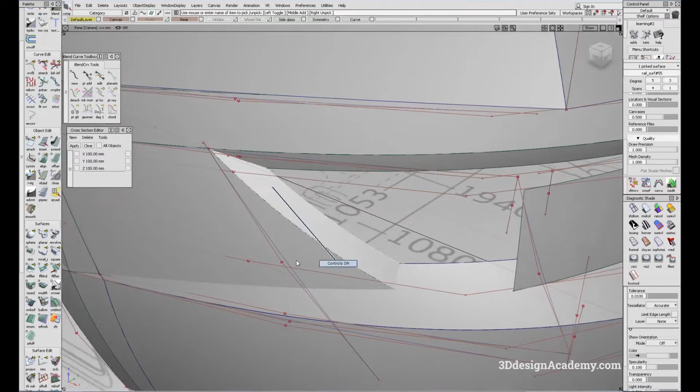In the previous lesson we worked on the lower a little bit, so I'm going to continue with that. First thing is to clean this up a little because right now it's got way too many spans. So let's do a little cleanup. Right now it's a multi-span surface, it's a simple monorail, so I'm just going to simplify it a bit.

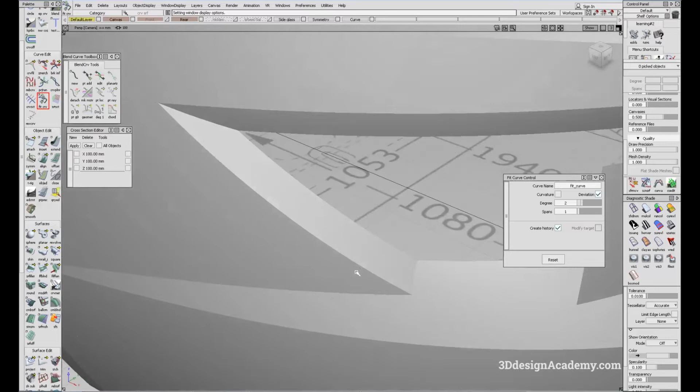Before I do this - because it's a monorail with a little angle on the surface, you'll see it looks a little hollow, as you can see right here. So I'm going to try to fix it a bit.

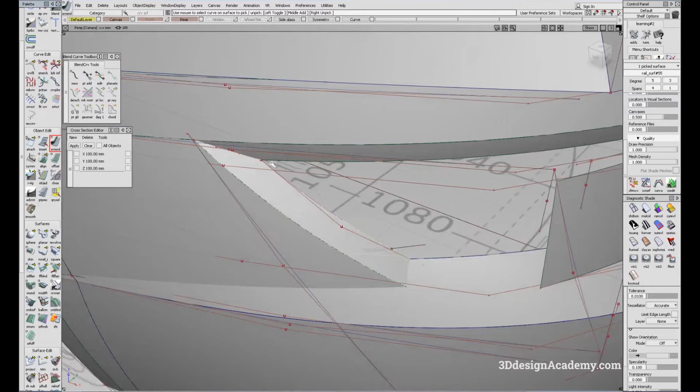What I'm going to do is a fit curve, degree 2. Because it doesn't need to be long, I'm just going to do something like that. I think that looks pretty good, and maybe I'll extend it over here too, like that. So right now this should be positional because it's a fit curve, and we matched this surface using this curve here, so that should be okay.

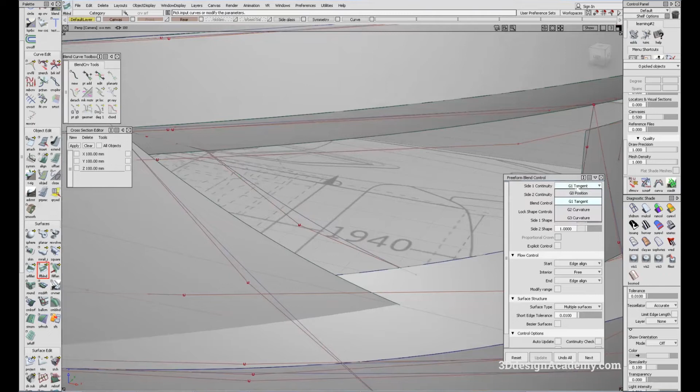Now let's try a freeform blend, position like this. Instead of doing an edge align, I'm just going to say default on this side too, and use explicit control, degree 5, to give it a little bit of crown. Maybe start with 0.005.

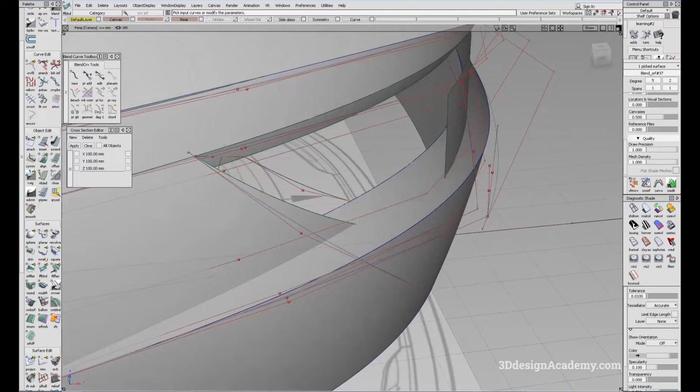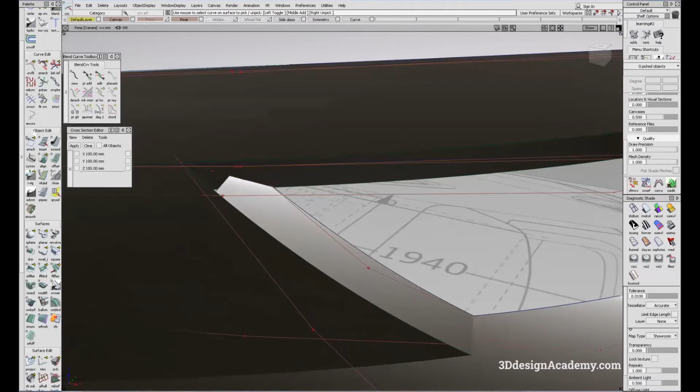I think that looks much better. Let's compare it to the image - yeah, just a little bit of crown, I think that should be okay. It's a little bit short here, so I'm just going to extend this piece like that.

I'm just going to make sure this is exactly positional over here. So that's good. Next step, I'm going to fill this hole right here. If you see the image, it's covered by - I don't know if this is an actual tail lamp - but we do need to fill this area because there's a surface there.

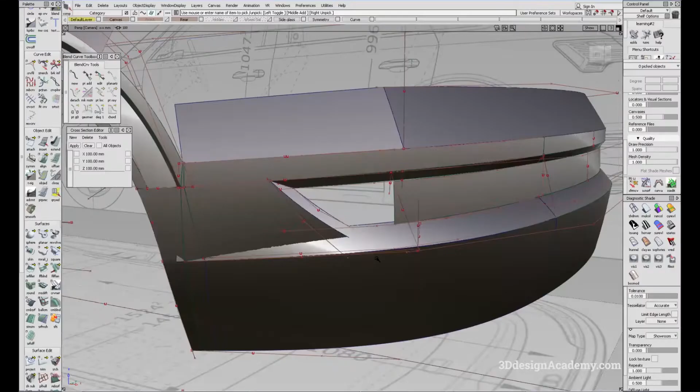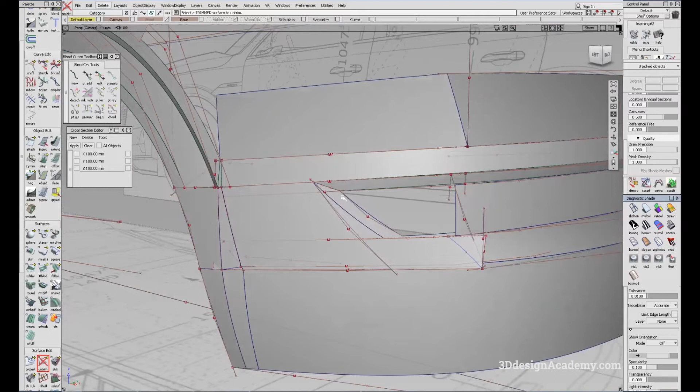First of all, I'm going to delete some of the history on these because I don't really need them, and I want to make sure they stay intact instead of history giving us trouble. So I'm going to say untrim, and on the top I'm just going to delete the history on this too.

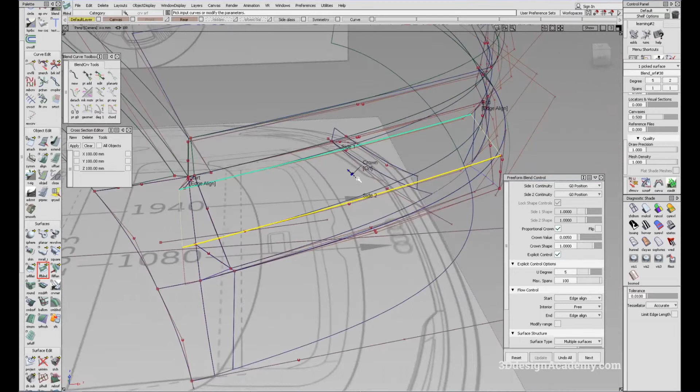I'm going to untrim the primary surface, and using freeform blend, position, I'm just going to snap over here like that, and say default. This one you can say default too - it doesn't really matter because you won't be able to see it anyways.

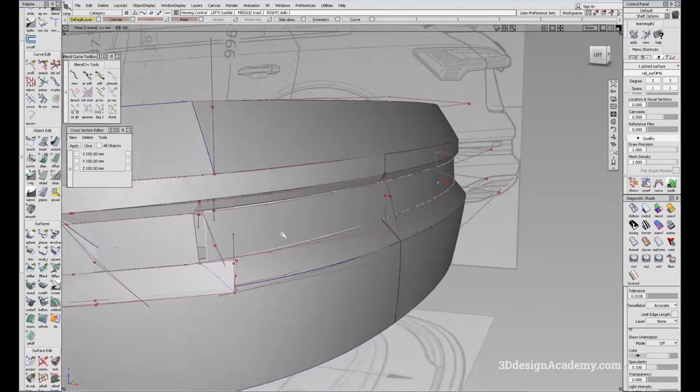Give it a little bit of crown - this was a rail. Maybe a little bit more crown, not quite sure. Okay, maybe not that much, so I'll just stick with 0.005.

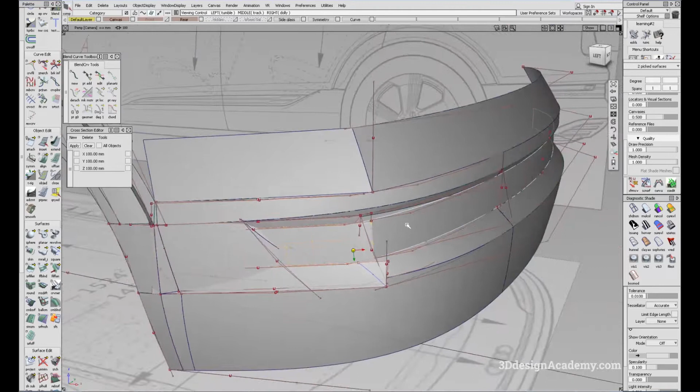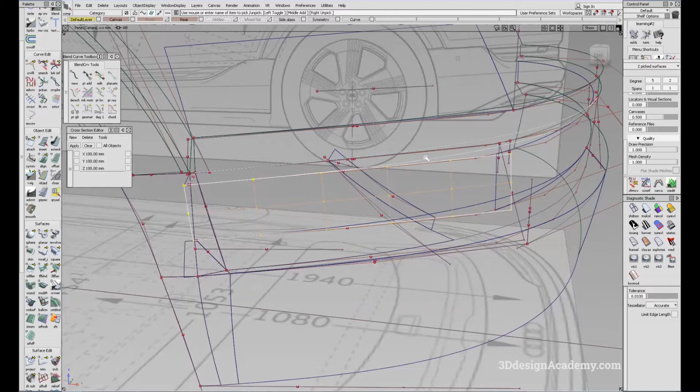What I'm going to do is extend these, and also this one - well, maybe I don't need to extend it. Next, I'm going to trim these surfaces back to their original shape, and grab this one, the fillet over here, the fillet down here, and the surface right here.

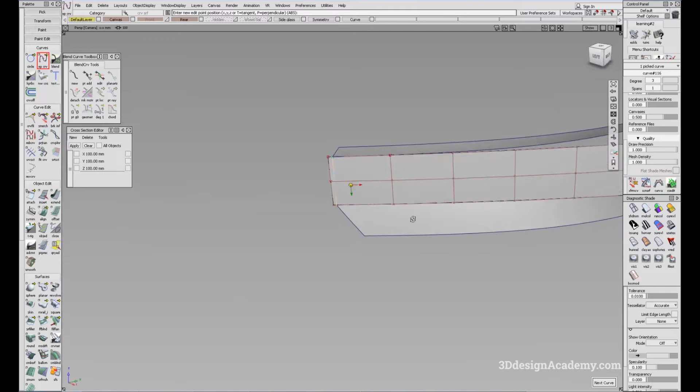Because we already have a fillet on both sides, all you have to do is connect the dots using a curve and fill it in with a square. I'm just going to do this, and same thing on this side, and I'm just going to project.

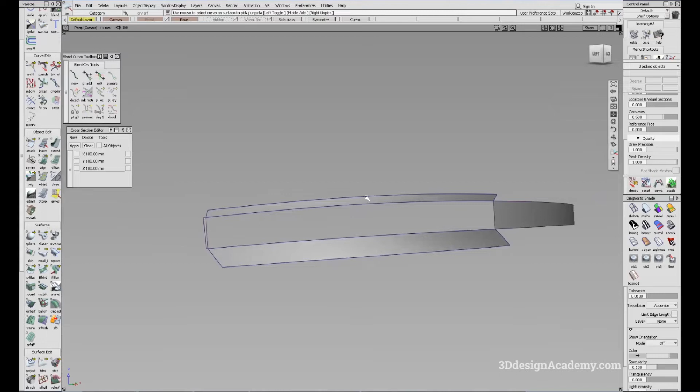And over here I'm going to keep, say keep. The reason I'm matching these is because if you see in the image, they follow the exact same line, so you want to make sure the fillet also matches between the top and the bottom. Using a square, I'm just going to say 1, 2, 3, and 4.

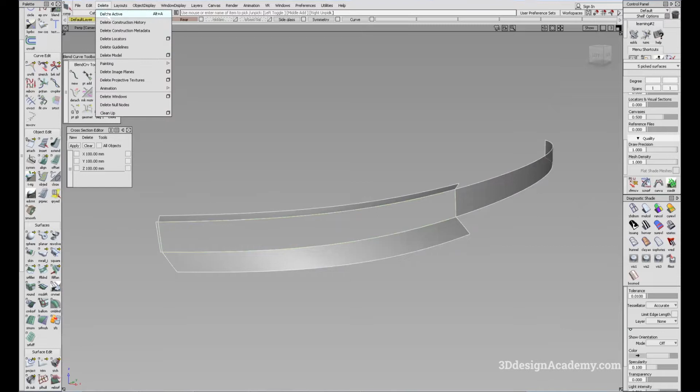Looks pretty good, maybe I can reduce it - looks like even degree 2 works. So that's very clean, I'm going to delete construction history. I'm happy with what I have.

Now you'll notice there's a little bit of a gap. Well, all you have to do is extend it and trim it. So I'm just going to extend it like this, and using intersect, I'm just going to trim this piece.

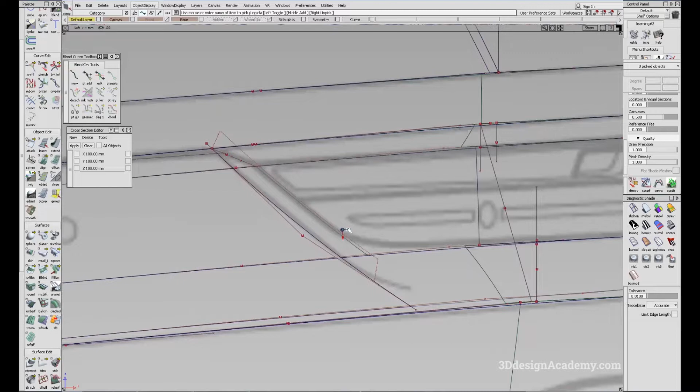Now what I want to make sure is that I know the intersect is a little bit different from the curve that I generated, so all you want to do is make sure it's pretty close. Looks like it's a little bit off here.

So instead of extending, I'm actually going to extend it back, and using a line, I'm just going to - it's a little bit long here. So, oops, what happened? Okay, I'm just going to revert, and using a line, actually extend first.

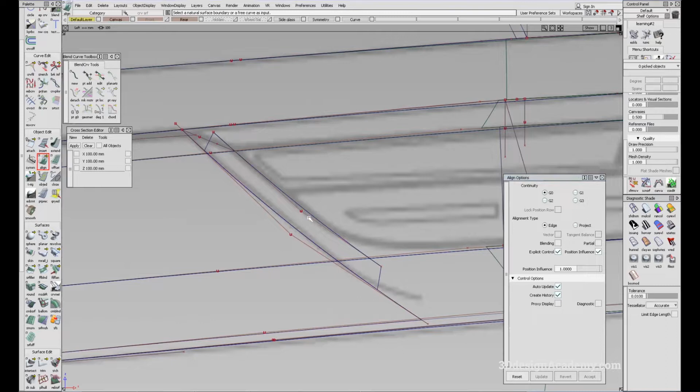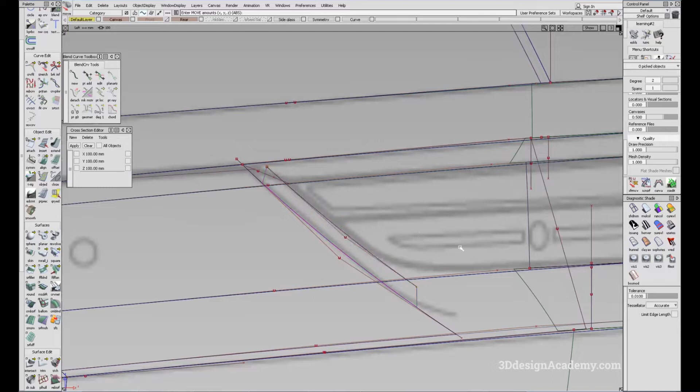Align to the surface, align the surface to the curve, save position, and blending on. I'm just going to shift this a little bit forward in car, because right now my line over here is a little bit forward of the canvas image. Oh, and when I'm doing this, I want to make sure that it's lined up well here.

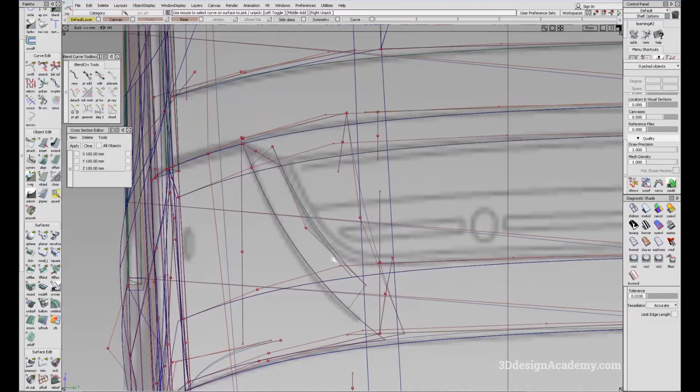Well, actually, we're going to use intersect, so I guess it's not too much of a problem. But I do want to intersect these two surfaces to make sure that the inboard line is following closely to this line. It looks like it's a little bit off. I'm going to guess that it's also due to the bottom one being a little bit inboard. So I'm going to say that's close enough, I think that's pretty good.

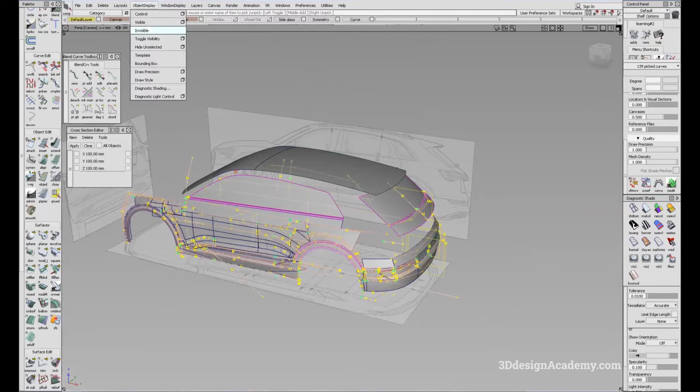So if that's the case, I'm just going to extend both sides and just do a trim. I'm going to intersect here and here, and just trim it. Then I'm going to get rid of all the curves, say invisible, and take a look at it and compare it to the canvas. Actually, I think that's pretty close. It's a little bit off, but I think that's pretty good. Okay, I'm happy with that.

Yeah, I think that looks pretty good. Okay.

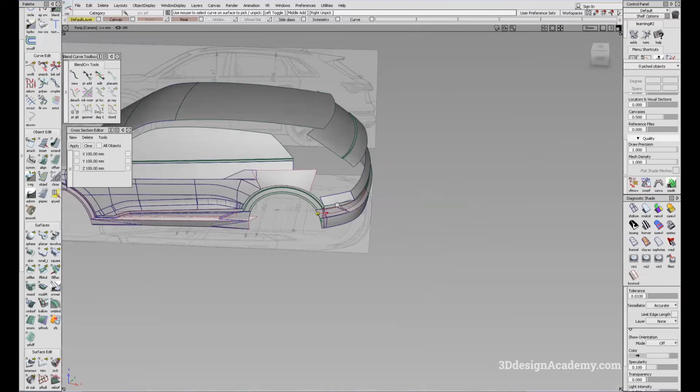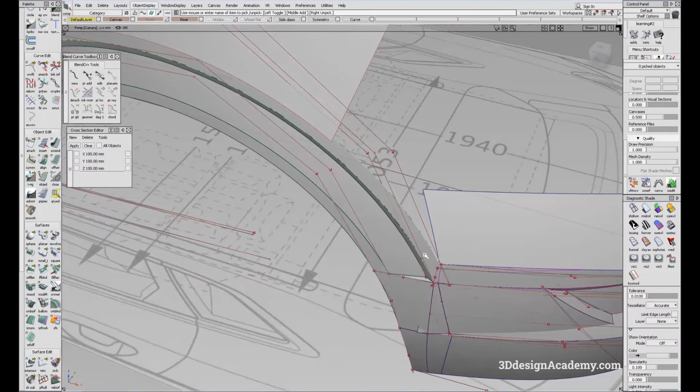So moving on, that space has been filled nicely. I'm going to continue on the fender over here. You'll notice that there's a little gap. So what happened is we had to remove this curve over here, or the wheel flare, in order to match not only the rear canvas, but the rest of the vehicle, and make it all more like the actual car. So in the process, I had to move this a little bit more inboard, and that's the reason why we have a gap.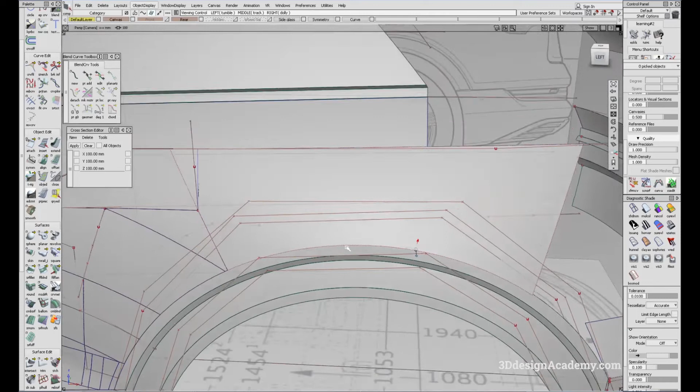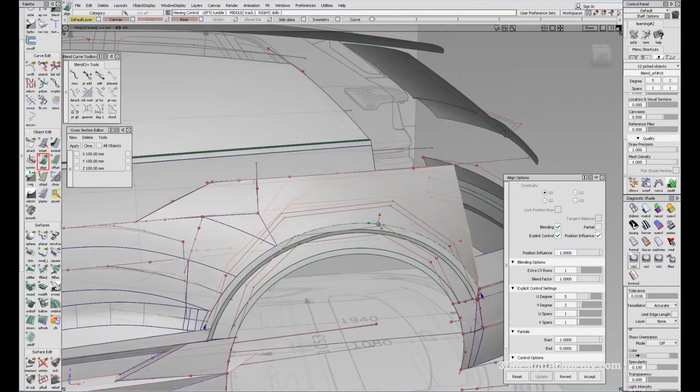So now we need to do some updates. First thing I'm going to do is make sure that this is untrimmed, and I'm going to align this piece to the new location of the wheel flare. So I'm just going to say align. You can either grab the surface or the curve, that doesn't really matter. And I'm going to say partial. Right now I have the blending on, extra CV 1, blend factor 1, and I think that's pretty good. So it's really actually quite quick to realign this.

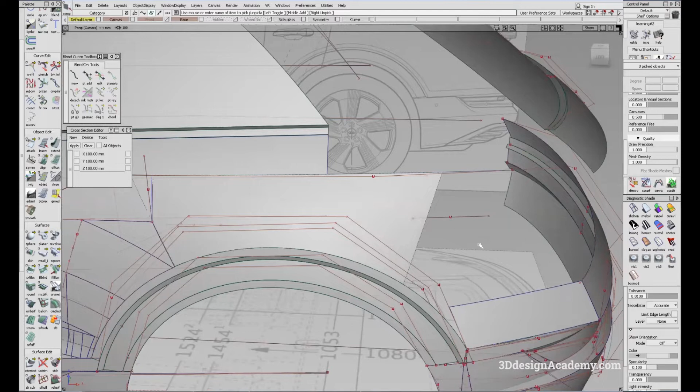Now I do have to realign all the surfaces over here, but I'm going to save that for later because I want to cover some of the area over here. Okay, so the next thing I'm going to do is try to fill this area over here.

So what I'm going to do is, first of all, I'm just going to go to side view, and I want to fill the space over here. I think I'm going to start with the top piece over here. So I want to fill this area, and you'll notice that there's a feature line that actually disappears into the fender. So I'm going to try to create that.

Okay, actually, let me go to the side view. Let me see if I can get an image of the side view and see where I need to do this. Okay, so on the side view, you'll notice that this line starts to disappear around here. So I'm gonna have to, I'll probably do the same thing over here. So I think this, the chrome piece, where the location of the chrome piece is, I think that's a good location to start this piece over here.

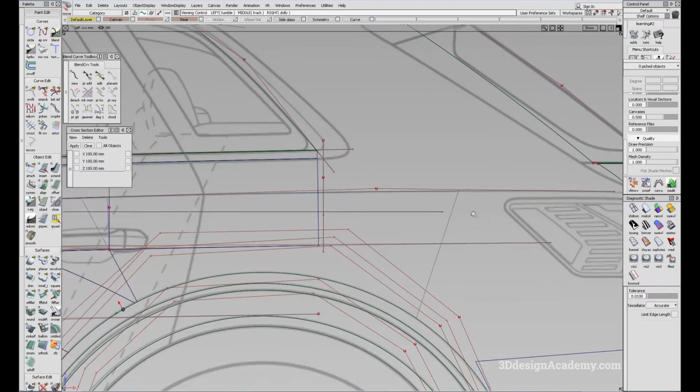Okay, so I'm just gonna go back to the model. I'm just going to do a curve like this, just up and down. And right now we're just trying to fill the hole and see how it looks. So it doesn't need to be super exact. We're just looking to block in some surface and see how the shape works with the rest of the vehicle.

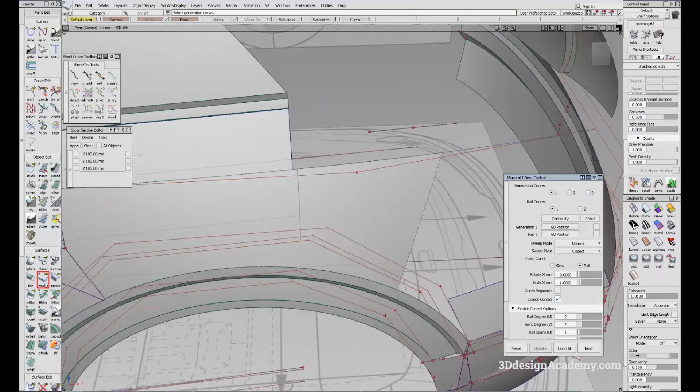Okay, so I just projected a curve from the side view, and I'm just going to use that to create a monorail. So, 1 and 1, like this, and I'm going to be using the curve segment tool like this here to snap it over here. So it's a little bit off. Okay, so that's good, nice and straight. It gives us a nice parallel horizontal highlight.

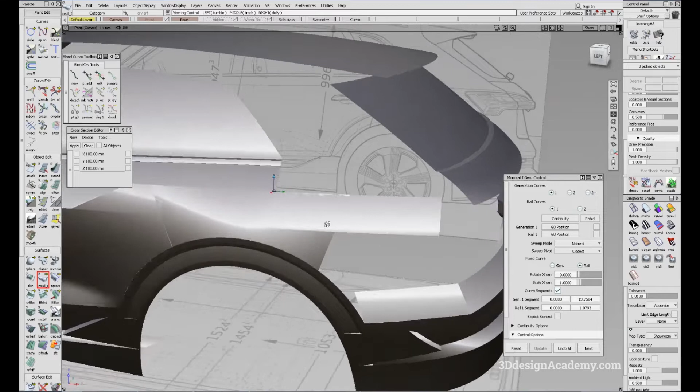Okay, so that's been filled. And next, I'm gonna, okay, so this one, I probably have to create some surfaces over here.

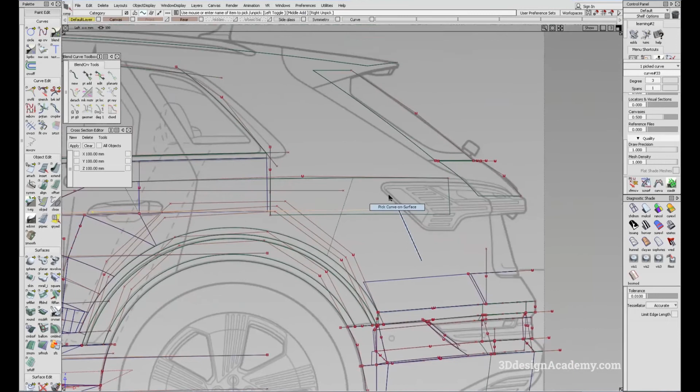But in the meantime, let's see, it looks like that's a body feature line. Okay, so what I'm gonna do is I'm just gonna project this curve. Now there is a chance that I might have to adjust this, but using the project, I'm going to just trim away this piece so that we can control this feature line over here. Now this actually needs to blend into the tail lamp over here, and you'll see that it's sort of ending up somewhere in the middle of the tail lamp. So I'll have to blend it in with the rest of the rear.

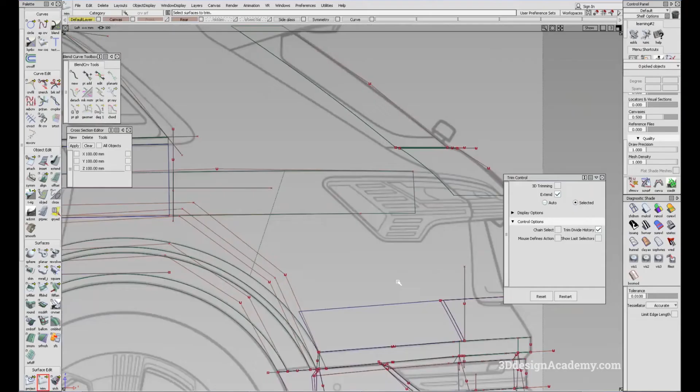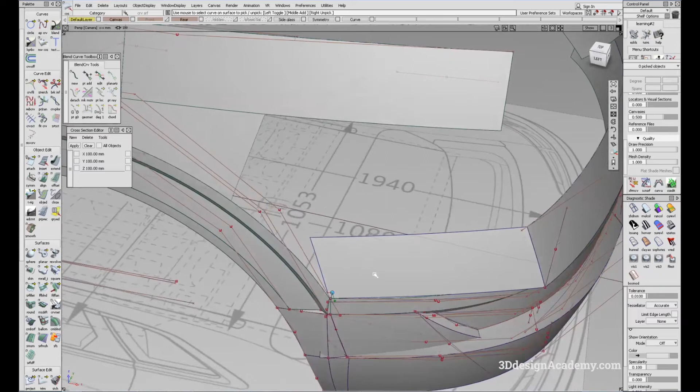Okay, so I think I'm just going to position it over here for now, and we'll have to adjust it once we get some of the rear surfaces filled in. Now the next thing I'm going to do is I'm going to try to fill this surface over here. This should be a very large slab, and let's see. What I'm going to do is I'm actually going to snap a curve over here, and I'm going to snap a curve over somewhere here.

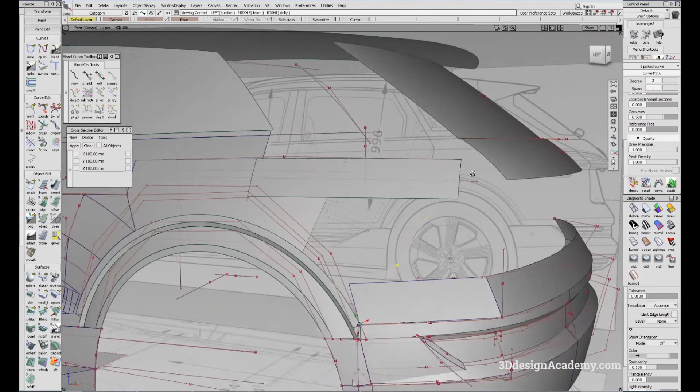Actually, I'm going to do just a straight up and down. Now it is a straight up and down, and it's a little bit longer than I need. So I'm just going to use a stretch tool to snap it at this point right here. Oops, oh, it actually snapped at the curve. So I'm just going to make that invisible. Again, using the stretch, snap it back here, and using a degree 2 curve. Change that to degree 2, and I'm going to give it a little bit of crown.

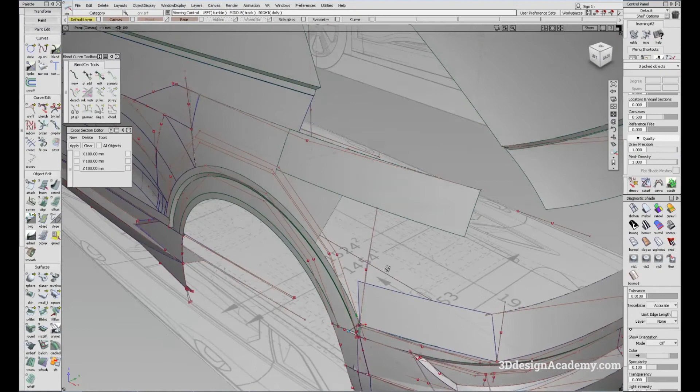Now, when you see this feature surface over here, you'll see that there's a little bit of light catcher, which means that you can snap the curve over here to the feature line, but this one, on the other hand, has to be a little bit inboard to give a little bit of light catcher over here. So I'm going to use the stretch tool like this and just move it slightly inboard. And I'm going to try to create a rail using this. So just a simple rail. It's going to have a span in the middle because right now I'm putting the generation curve in the middle of the rail curve, but that's okay.

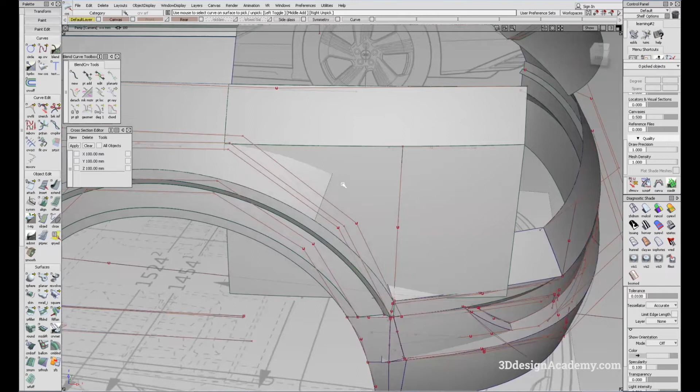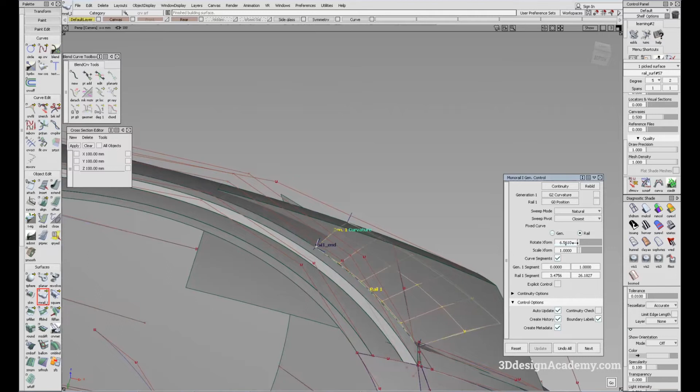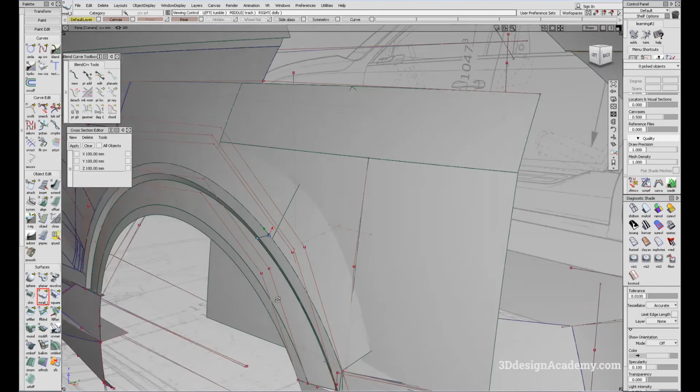Okay, so the next thing I'm going to do is, because we need to figure out the distance between the wheel flare and this body surface, I'm just going to do a rail over here like this. And I'm going to do a curve segment over here, and make sure that generation 1 is G2 curvature. Now the CV structure might be off, so maybe I'll do a little bit of rotation like this. Oh, maybe that's not working so well. So there's a chance that I might have to fix this area a little bit. Maybe I'll just not do rotation and leave it like that. And if need be, I can just do a fillet over here. So I don't think it should be a critical problem.

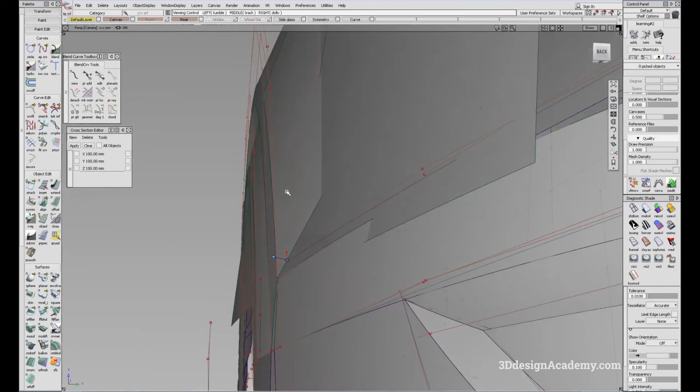Now, the next thing I'm going to do is I want to make sure that this surface and this feature line over here also have a nice relationship. Actually, I think there's a little bit too much distance between the wheel flare and the surface over here. So using stretch, I'll pull this a little bit more outward. Now, you'll see that this is such a slight light catcher or feature. So you also want to make sure that this appears very small.

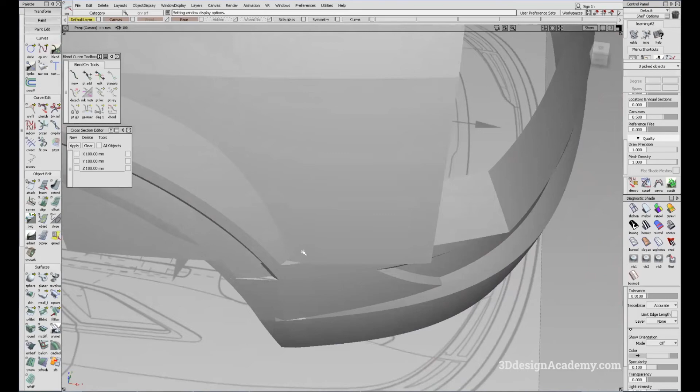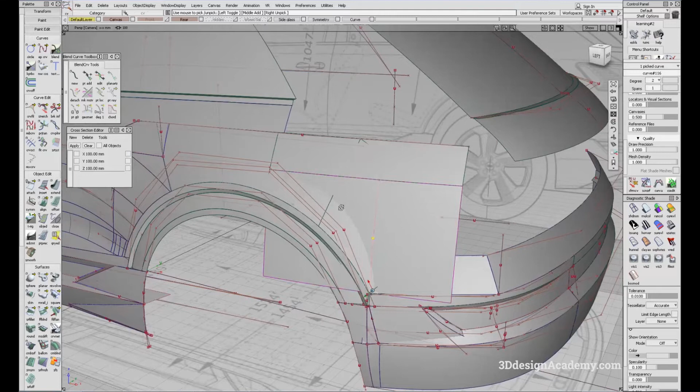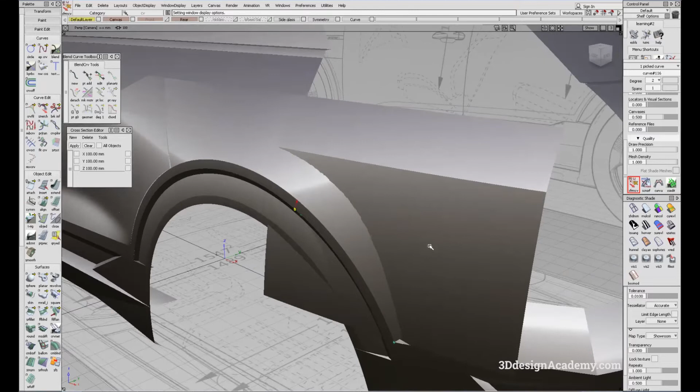Now, you'll see right here that we were able to achieve a reduced amount of, I don't know if you call this a light catcher, but reduced amount of fender space. So it goes from wide to thin. I know it's a little bit wider here, but I think we'll probably need to do some refinements later on. Maybe I'll just give it a little bit more crown to reduce the section in the middle. Something like that. And with the intersecting surfaces, you'll be able to see a nice relationship between the side surface and the fender. I'll just give it a little bit more crown. Okay, and that's good.

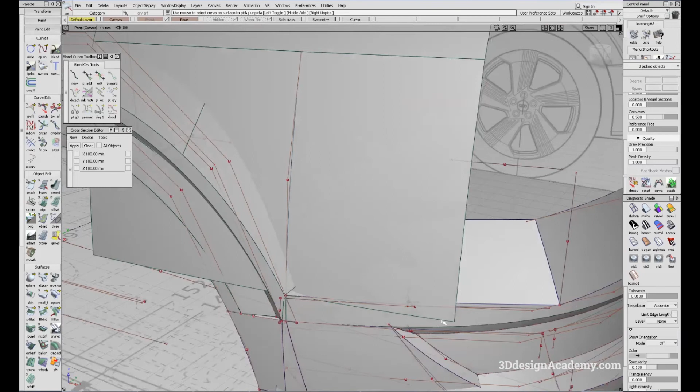Now, the next thing: you'll see that the relationship between this surface and this surface is not good. It's not aligned, in which case we have to make it so. So the first thing I'm going to do is, now you'll notice that this is actually a little bit off. We created a new curve over here. Oh, this is actually a different curve. Okay, let's see.

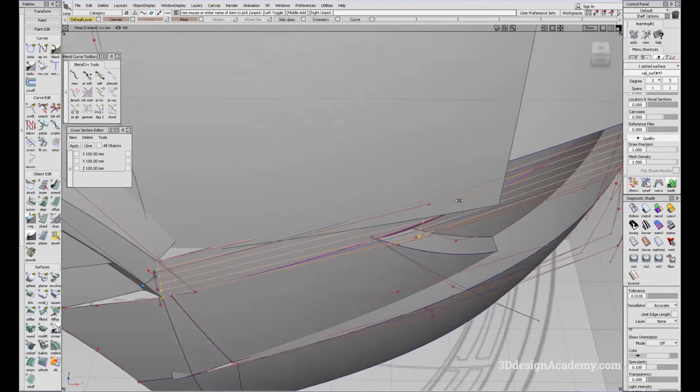Oh, maybe it is. Okay. Now I'm just going to delete the history on this and also on this piece over here so that it doesn't create any problems. So I'm just going to untrim it, and you'll notice that it's a little bit off from the surface that we had before. Right now this surface is a lot more complementary to the other surfaces and also the canvas.

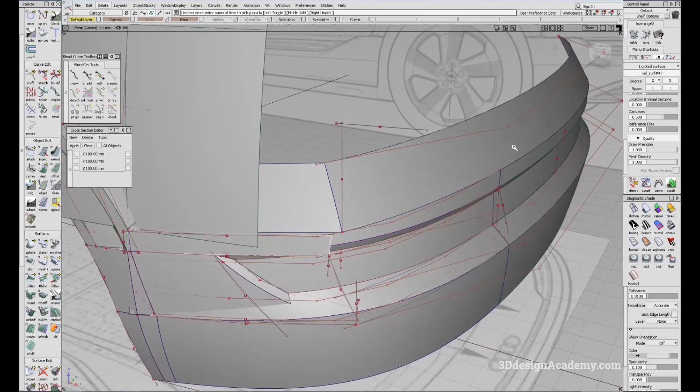So I'm going to snap the surface to this edge over here. I'm going to just untrim this piece over here. Actually, I should maybe extend this too. Okay, so I'm going to extend this first. So I'm going to say untrim. I'm going to make sure the symmetry is on, and I'm going to extend it just slightly beyond this point.

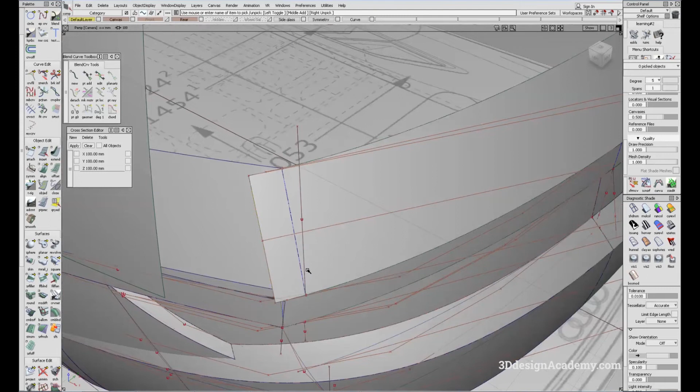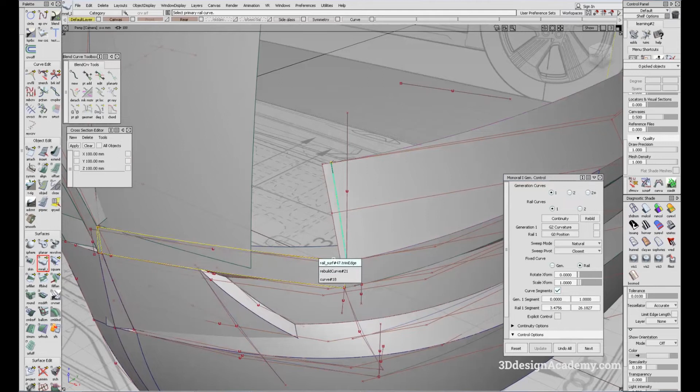And I'm just going to actually remake the surface. So I'm just going to snap it right here where these two intersect, and delete the curve and surface. This surface we no longer need. I don't know if I'm going to keep this angle, but let's use that for now. So I'm going to say project normal like this, and using the rail curve or a monorail, I'm just going to do a rail. This is going to be position.

Okay, so it looks like that's actually creating a problem. So I'm just going to trim this piece away, because right now the rail is longer than where the generation curve is located. Oh, actually, we might need to update this too. You'll see that there's a little bit of height difference. So I'll update that. I'm just going to delete the curve and surface over here. And because it's a little bit short here, I'm just going to re-intersect. So intersect.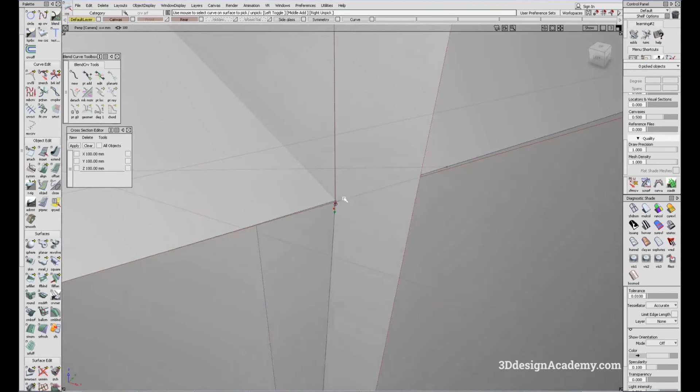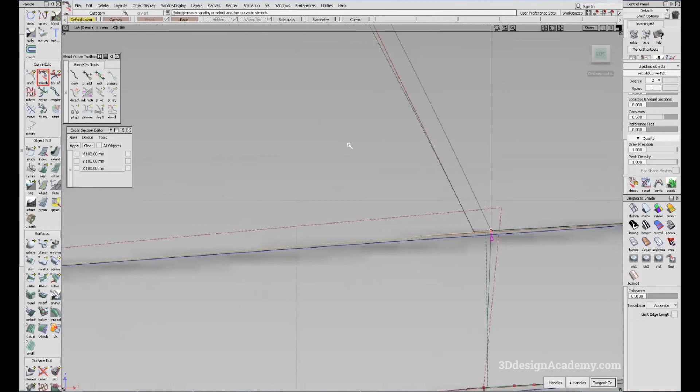And this curve over here needs to be moved up. And this curve over here, which I used to project with, also needs to be updated. Okay, so where did it go? It looks like this is the curve that I used to project with. So using the stretch tool, I'm just going to snap it over here, and I'm going to reproject. Just gonna grab this one, project this curve on there, like that, and I'm gonna change it to view. Now I'm just gonna make sure that it is snapped right here.

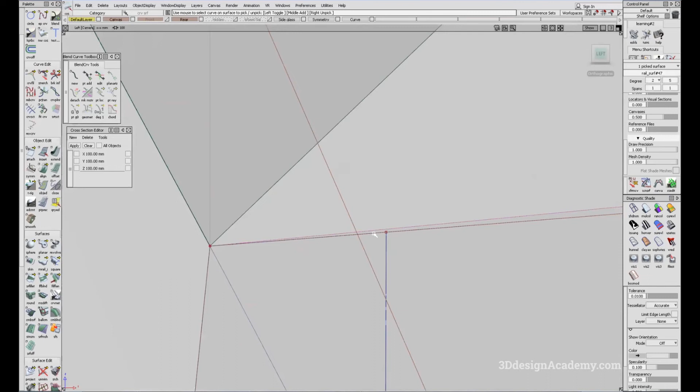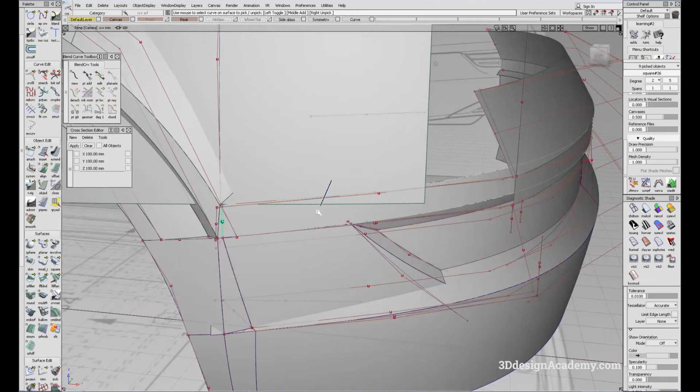Okay, so that's good. Oh, actually, because I deleted the history, I probably need to update this too. Or do I? Okay, I think it's okay. So I'm just going to trim this piece away right here. And now in the process, I probably want to align this again. Align. I'm going to turn blending off, G2, and I'm just going to make sure that this is edge. Now it's just a minuscule change and you might not notice it, but we still need to make sure it's nicely aligned.

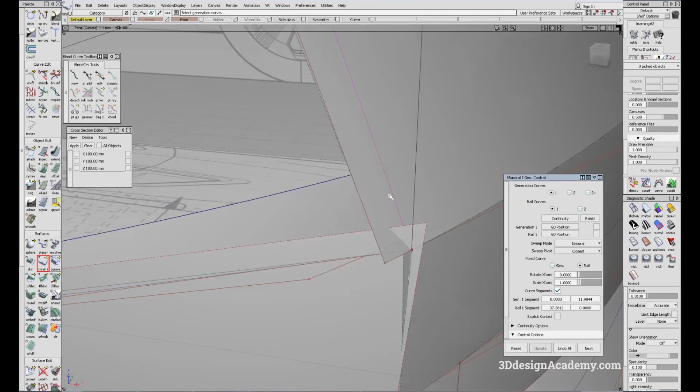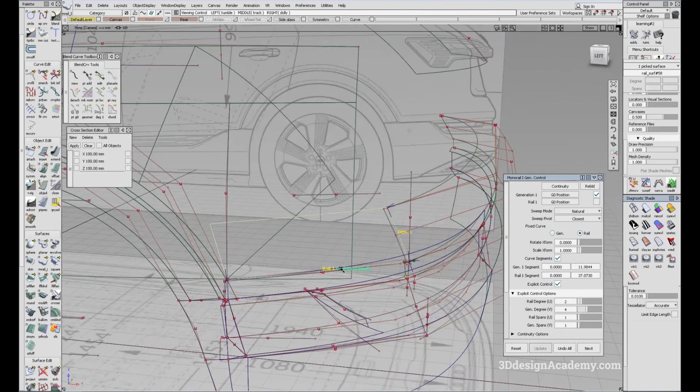Okay, I'm just going to untrim this piece again, and using this edge or the curved surface, I'm just going to create a rail. So monorail, I'm going to grab this piece and the curved surface over here and just do a rail. And looks like we got too many spans. Explicit control on. Now generation curve, degree 3, 4, and the rail curve. Looks like it's position failed now. 3, 4. Okay, looks like 4 will do.

Okay, so now that we have this one, I just want to make sure that this also is complementary to this line. So I'm going to use a rotate. Pressing Alt and dragging the mouse in this box over here, I'm just going to make sure that this is somewhat complementary. I don't know if this should be parallel or it should be shrinking or becoming larger. It probably needs to become a little bit. Well, I think it just needs to be complementary for now, and I'll try to figure out if this maybe needs to be a little bit bigger.

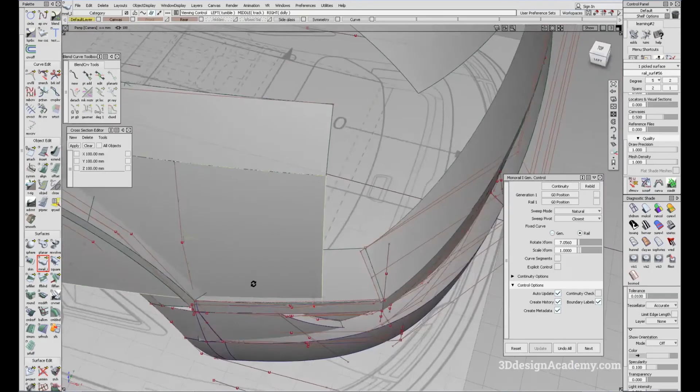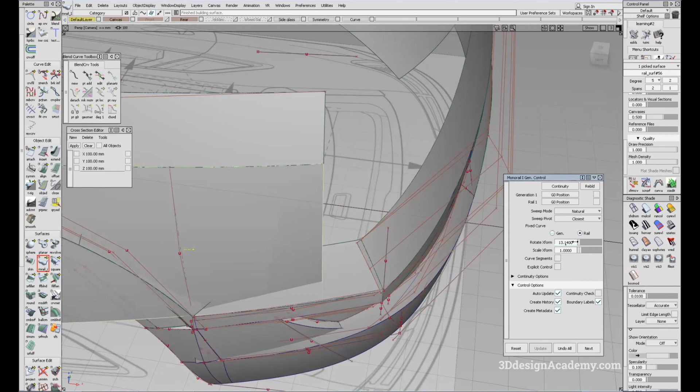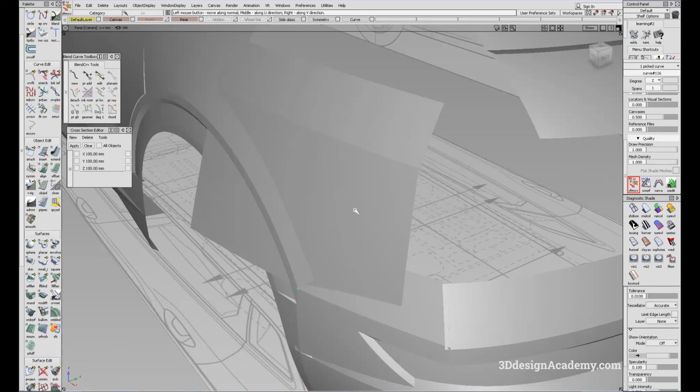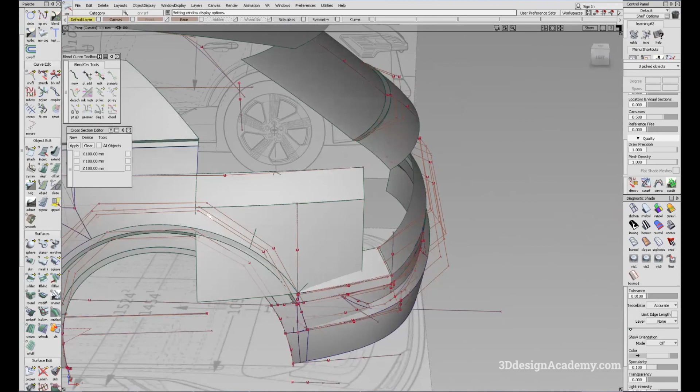So, okay, I think that looks good. And I think I probably want to pop this out a little bit more. I think there's a little bit too much. Okay, so I think that looks pretty good. I think this is a pretty good start to the rear. Of course, I would have to make some adjustments, but right now there's a nice relationship between the fender and the body side surface, and the relationship between this and this is also looking very nice.

So next step, I'll probably have to build more surfaces in the rear and try to connect the rear and the side. Okay, so that's it for part 30.